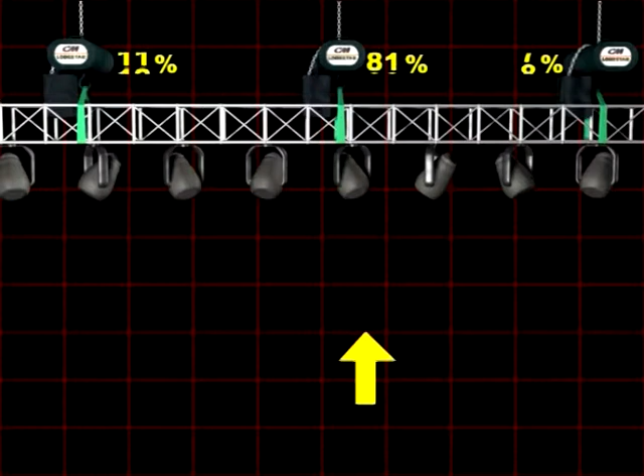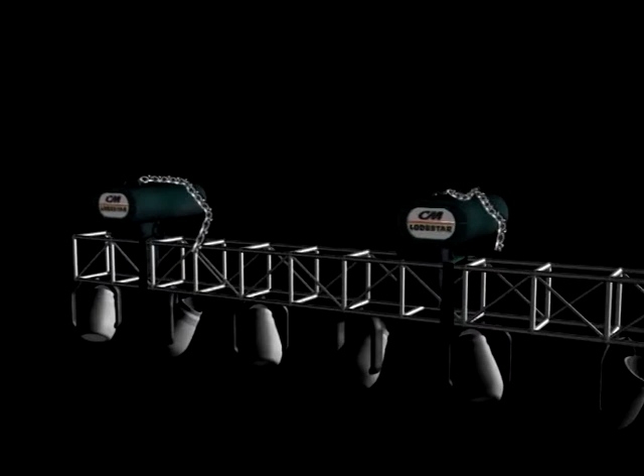Thus, overload situations might happen to the most experienced riggers, even if each hanging point's load is calculated and the calculation falls within the limitations of the nominal hoist and truss capacity. The actual load distribution on the truss is still unpredictable and cannot be calculated or even estimated, which in turn might cause an overload situation.

In real life, the rigger doesn't have a pause button.

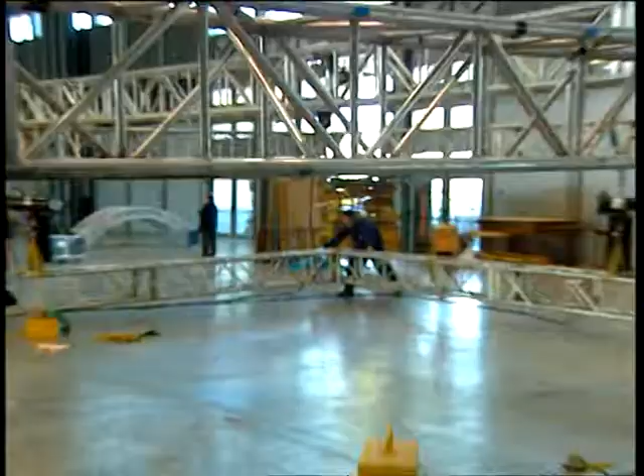In its January 2007 meeting, ESTA Task Group on Chain Hoist Usage decided to have its member, Eilon Engineering, conduct an experiment aimed at measuring loads and load distributions that occur in day-to-day stage rigging scenarios.

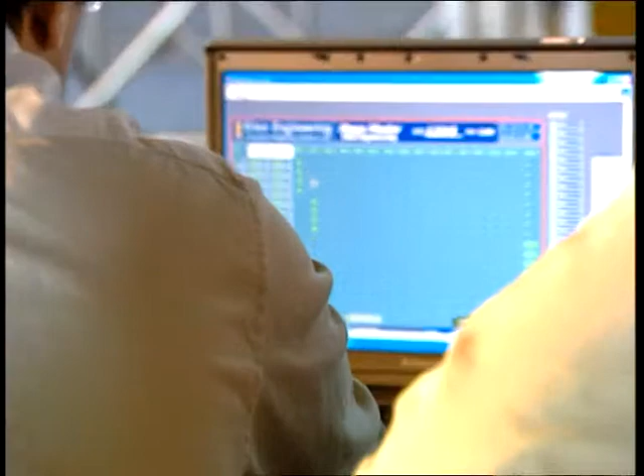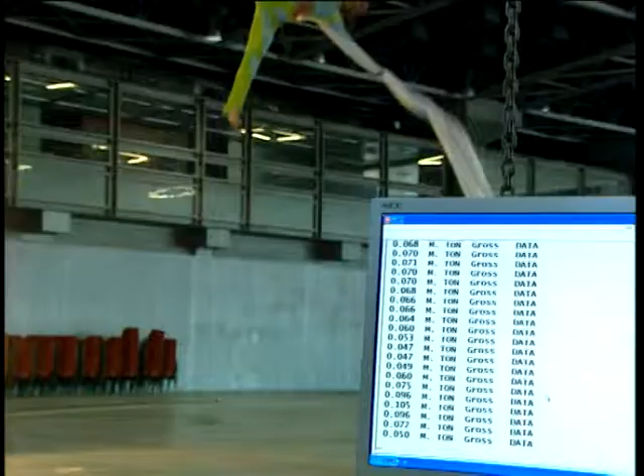On March 5, 2007, an experiment was conducted by Eilon Engineering in the Exhibition Center in Tel Aviv, Israel. The purpose of the experiment was to check the forces and loads involved in acrobatic shows and in lifting and hanging sound and lighting equipment for entertainment purposes.

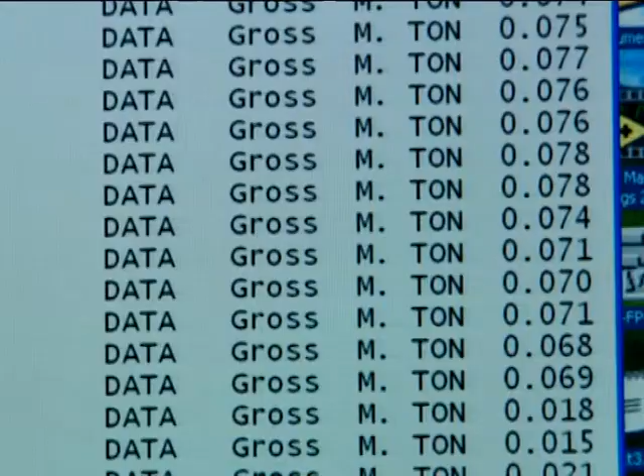The experiment was conducted in the presence of Bill Sapsis of Sapsis Rigging Installations USA, and with a special system which enables 25 measurements per second.

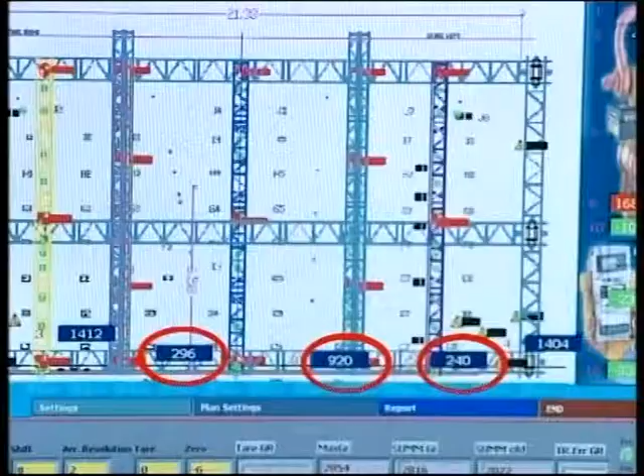Experiment 1: a structure of 1 truss with 3 loads and 3 hoists. Experienced rigging personnel attempted to level and balance the truss. When using the load cells, we could see that the attempts to balance the truss visually resulted in random balancing and imbalanced load division on the hoists.

We also noticed that the slightest operation of one of the hoists, even for a fraction of a second, resulted in the addition of hundreds of pounds, while the truss still appeared to be balanced. Conclusion: a visually balanced structure is likely to have imbalanced load division, and some of the hoists might even be overloaded.

Experiment 2: a mother grid structure was erected. The upper grid was suspended from the ceiling by 4 identical chain hoists simultaneously controlled by 1 switch. 1 load cell was hung in line with each of the 4 hoists. An identical arrangement of grid, hoists, and load cells was suspended from this upper grid.

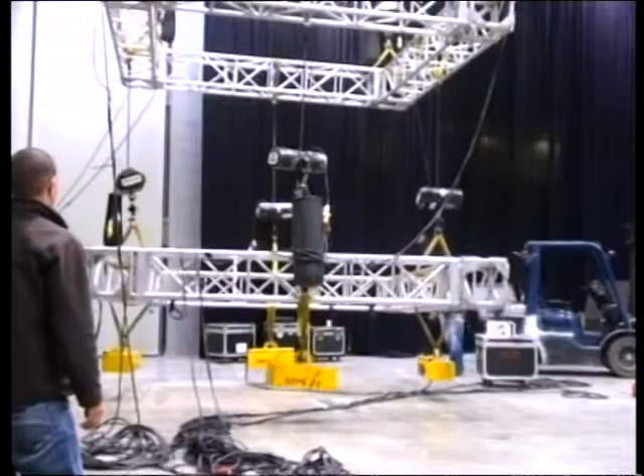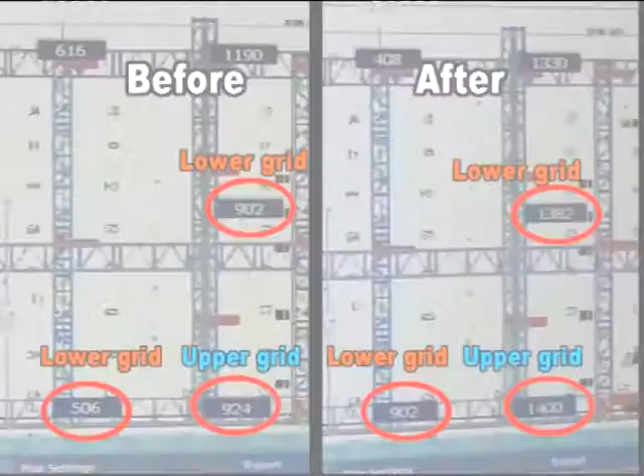In the experiment, a slight change in the weight of the loads on the lower grid triggered a practically incalculable change exhibited by the load cells. Conclusion: on a mother grid structure, any changes in the lower grid load or load distribution will usually change the load values and distribution on the upper grid, which in turn might cause an overload situation.

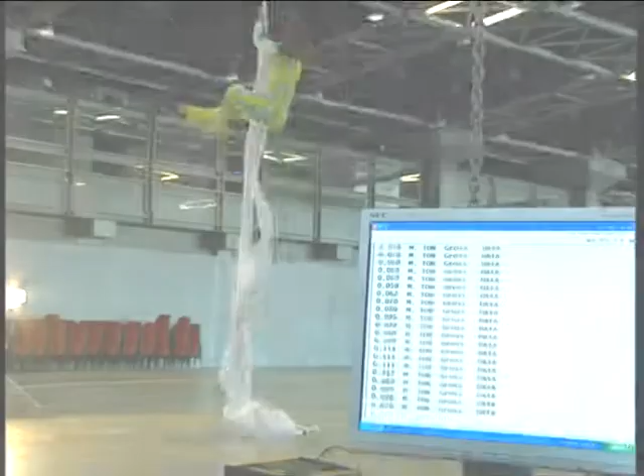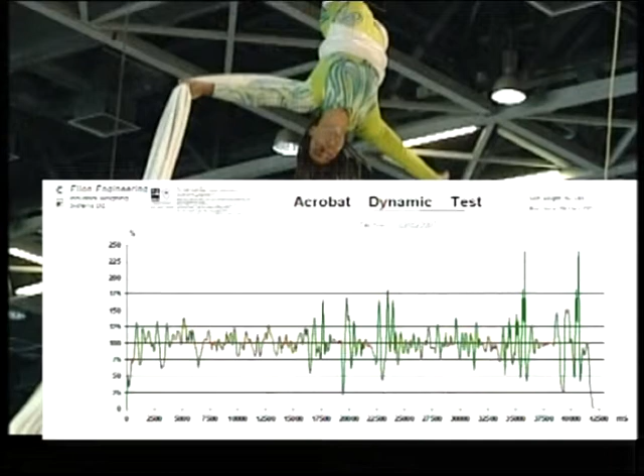Experiment 3: measurement of dynamic loads involved in an aerial acrobatic performance. The load cells recorded a maximum of 237% of the acrobat's self-weight. Conclusion: significant dynamic loads are involved in aerial acrobatics.

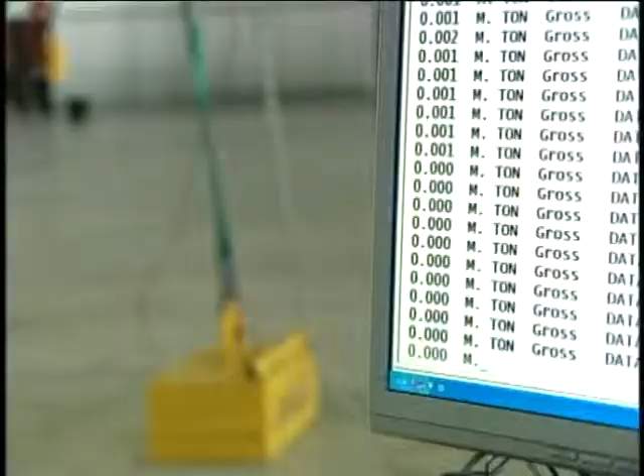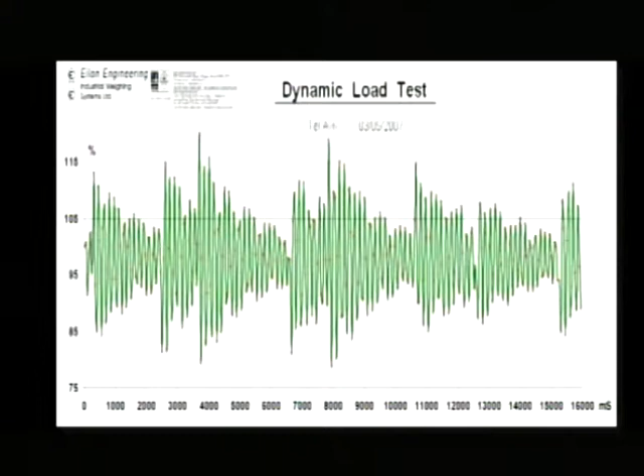Experiment 4: measurement of dynamic loads involved in lifting a load with a hoist and stopping the hoist's operation. This test was conducted with both 50 feet, 16 meter per minute, and 14 feet, 4 meter per minute hoists. With the 14 feet, 4 meter per minute hoist, the load cells recorded a maximum measurement of 120% of the load's weight.

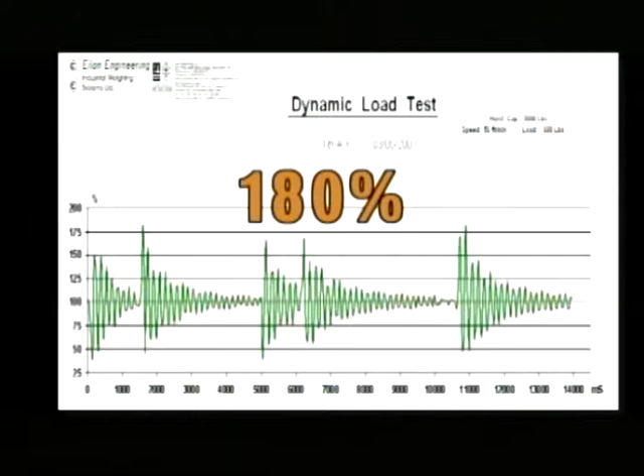With the 50 feet, 16 meter per minute hoist, the load cells recorded a maximum measurement of 180% of the load's weight. Conclusion: dynamic loads exist when starting or stopping the hoist's operation. The faster the hoist, the larger the dynamic forces.

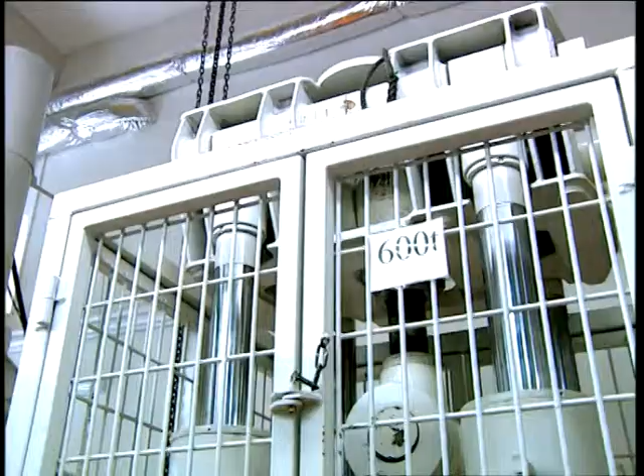Eilon Engineering has undertaken to harness our engineers' 3 decades of leadership in the industrial load cell industry to develop and launch a reliable, user-friendly platform to boost the rigger's performance, especially in preventing stage accidents due to overload. We are now proud to introduce the RON StageMaster, a completely wireless multi-load cell system for load monitoring and overload prevention.

The RON StageMaster is comprised of 3 components: the load cells, central receiver, and PC software.

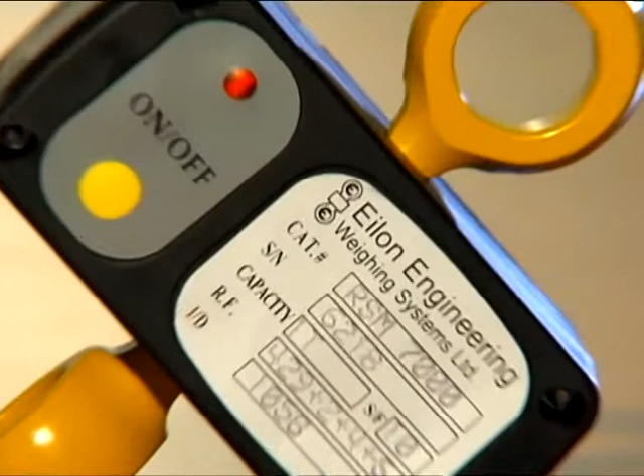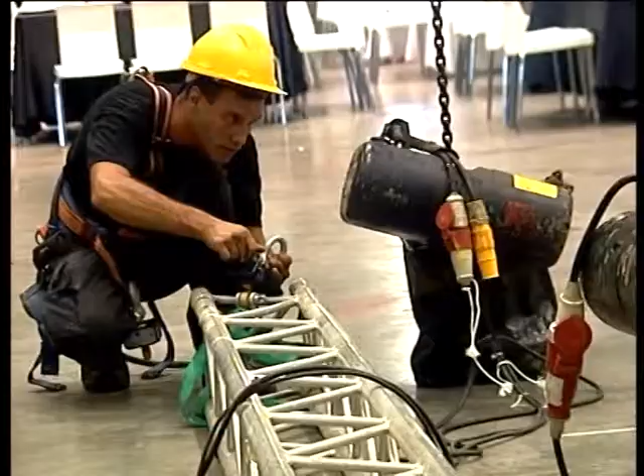The load cells. The RON StageMaster load cell embodies the technical know-how and the field experience that has been acquired from the sale of thousands of RON industrial crane scales over 3 decades now. Installing these wireless load cells onto the hoists is quick and easy. No messy cables for the wireless models, and a single main wire for the wired model.

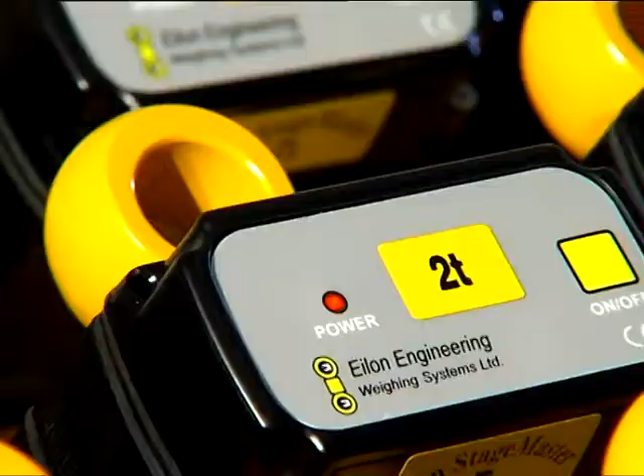The load cell is made of high-quality aerospace steel and is available in 2 safety factors, 5:1 and 10:1. It is available in standard capacities of 1 to 5 tons. Higher capacities are available, and in sets of up to 24 load cells per frequency and up to 4 different frequencies, with a system maximum total of 96 wireless load cells.

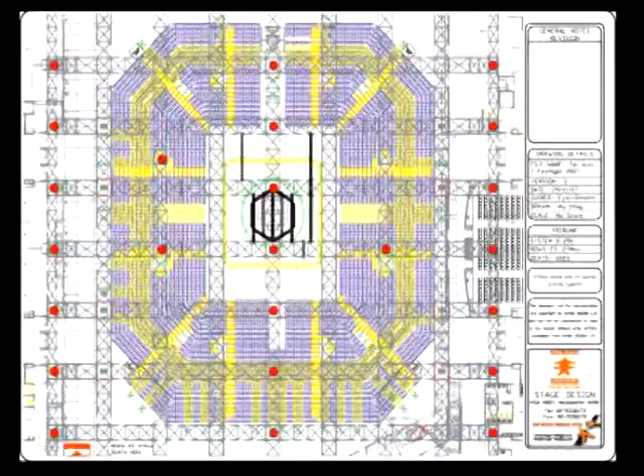Number of load cells: RON StageMaster 7000 Wireless Premium, up to 96 wireless load cells on 1 screen. RON StageMaster 6000 Wireless, up to 24 wireless load cells on 1 screen. RON StageMaster 5000 Single Wire, up to 256 load cells with a single main wire.

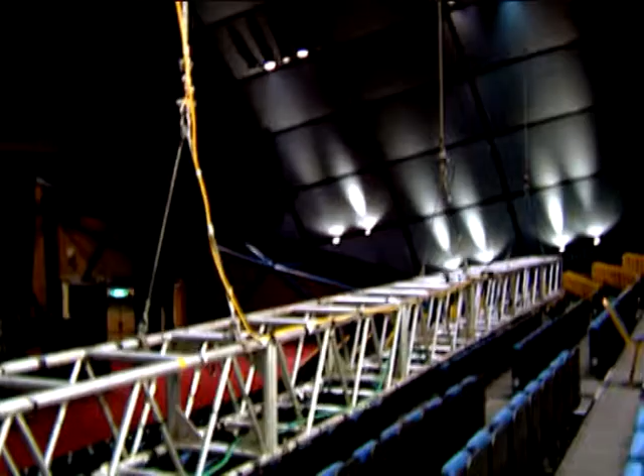The wireless RON StageMaster 7000 may be integrated with the single-wire RON StageMaster 5000 and together monitor on one screen a total of up to 328 load cells: 72 wireless load cells and 256 load cells on single wire.

The load cell shackle holes are shaped to have a 90-degree angle between their axes in order to eliminate external movement's influence which might cause inaccuracies. The battery life of this load cell is up to 1,500 hours on common disposable batteries, with optional 110-220 VAC operations.

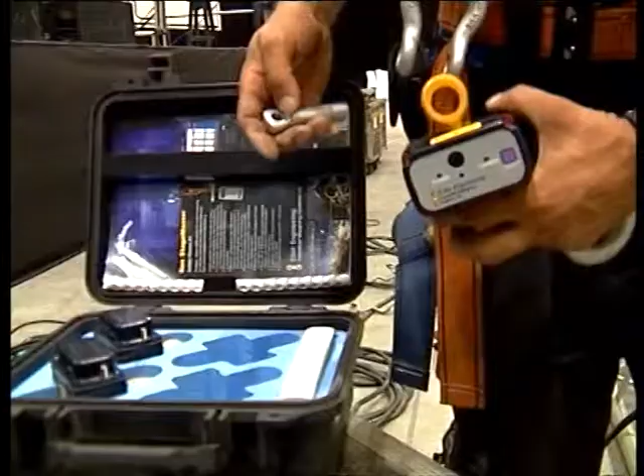Another distinguishing feature of the RON StageMaster load cell is its exceptionally small dimension that provides low headroom loss and easy portability. For example, headroom loss of the 2-ton load cell with 10:1 safety factor is 4.2 inches, 105 millimeters.

The central receiver has an RF reception range from the load cells of up to 500 feet, 150 meters.

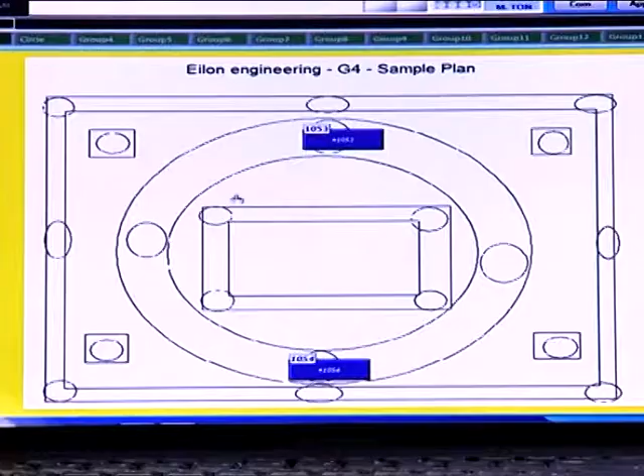The PC software. In addition to being the first wireless stage load monitoring system, the RON StageMaster is also the first to overlay the load distribution map on a grid plan preloaded from programs such as AutoCAD.

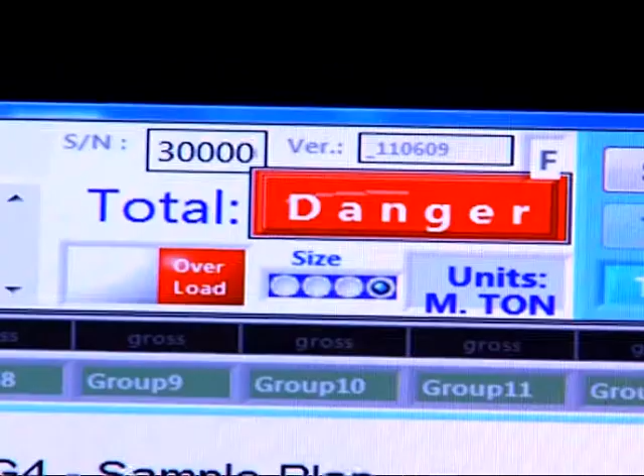This easy-to-install Windows 2000 compatible software provides real-time simultaneous load measurement, including overload and underload detection. It offers user-defined set points for overload and underload detection of individual hanging points, user-defined groups of hanging points, and of the entire structure.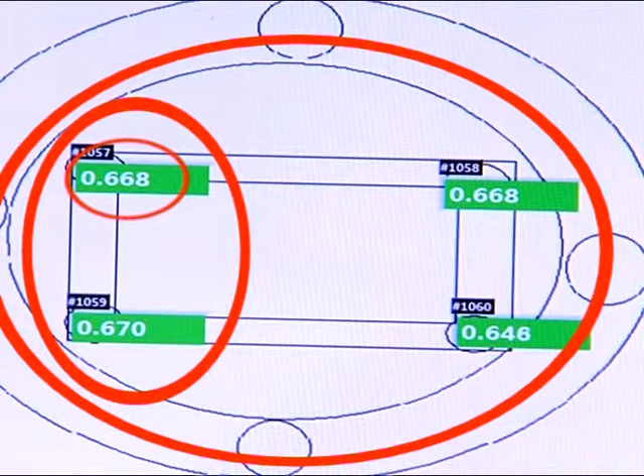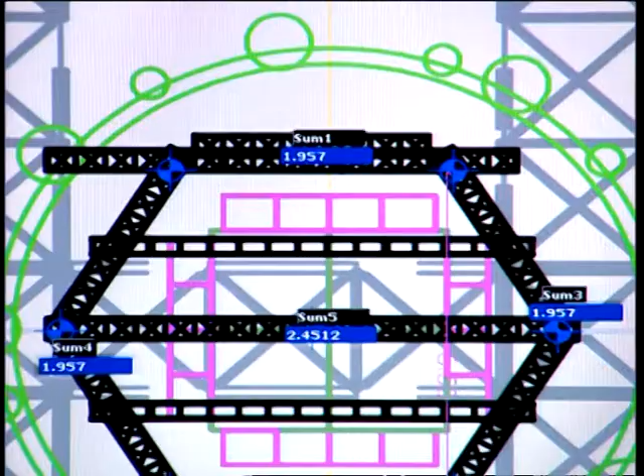Each set point can be used for a variety of purposes, such as setting off an alarm and stopping the hoists using any controller currently available on the market. Logical zoom-in and zoom-out features enable the operator to quickly spot specific load cells in groups.

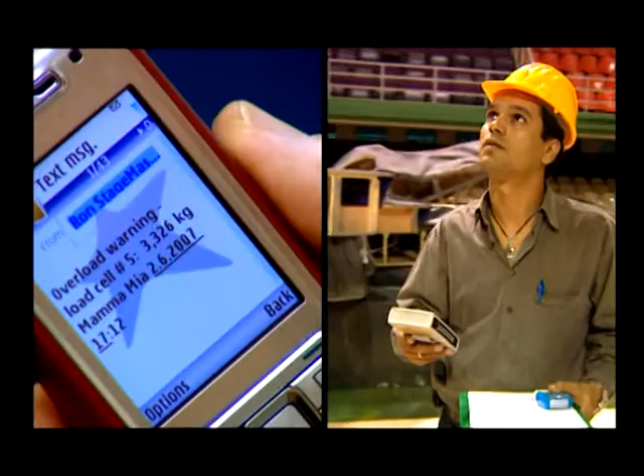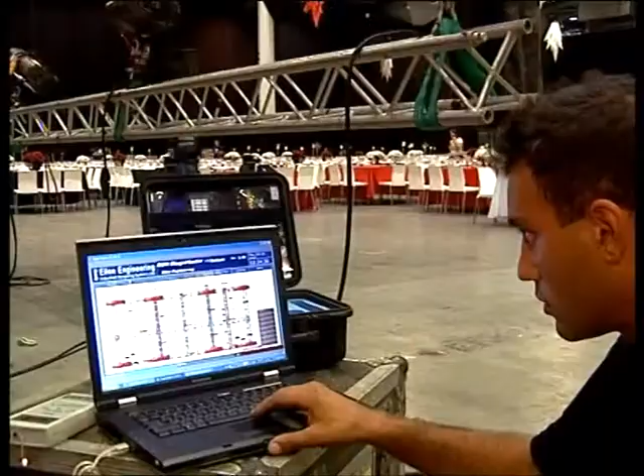Optional features include real-time cellular text message (SMS) alert on overload occurrence and customized PDA for on-the-go load monitoring. It is therefore an innovative tool to unburden the rigor of the stress involved in overload prevention without knowing the actual load values and distribution.

In addition, from a risk management perspective, the RON StageMaster may justify riggers' request for lower liability insurance premium.

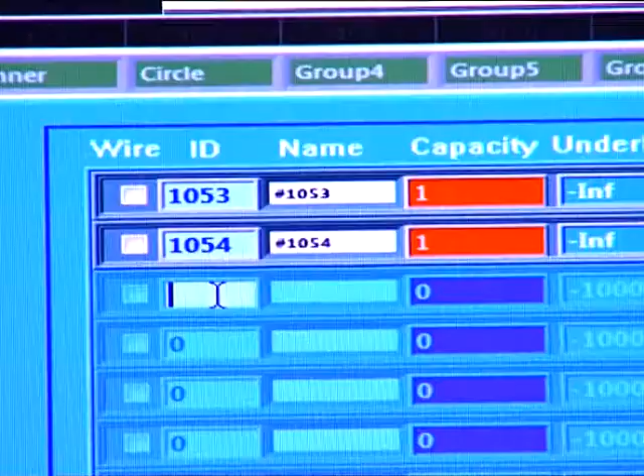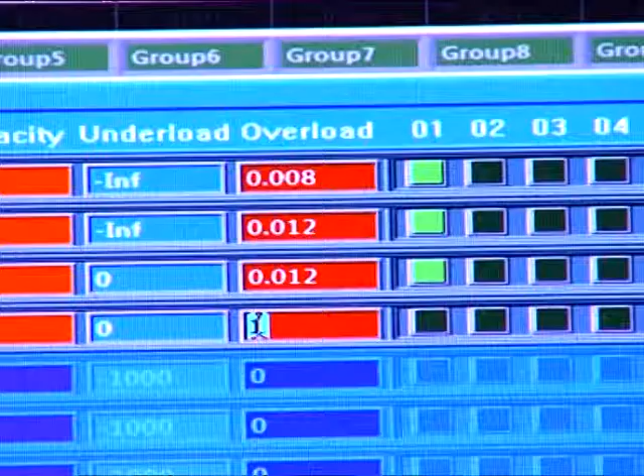Here is a summary of the main screens. Settings: using this screen, you determine which load cell will belong in what group and assign a customized overload value for each load cell. This screen enables you to drag and drop the load cells onto the underlaid grid plan according to their physical location on the structure.

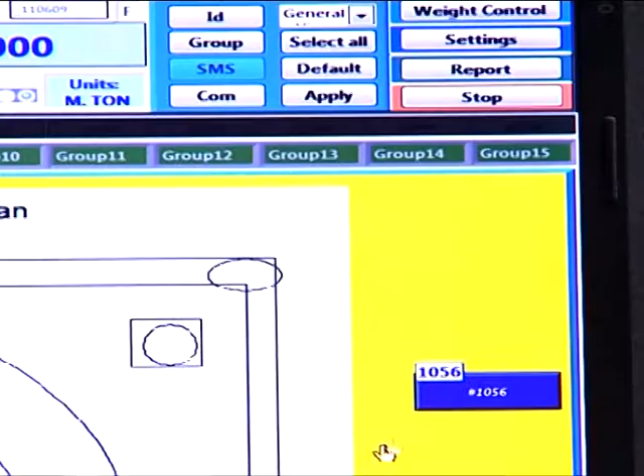This feature enables the rigger to immediately identify exactly where the problem is located on the stage structure. The next screen is used to assign group names to associate the load cells with the group functionality or location, for example speakers, east upper truss, etc. Using this screen, you set customized group overload values.

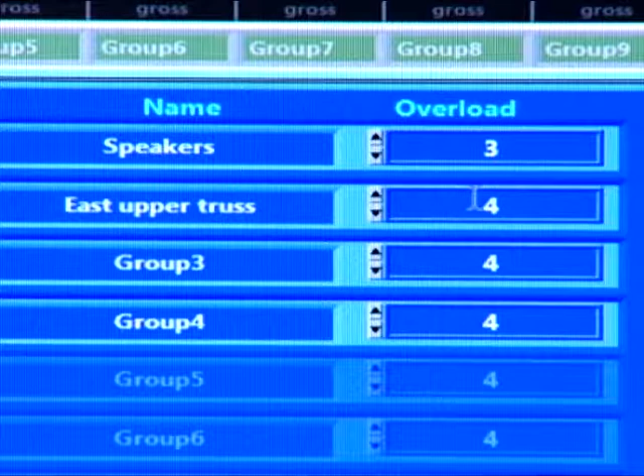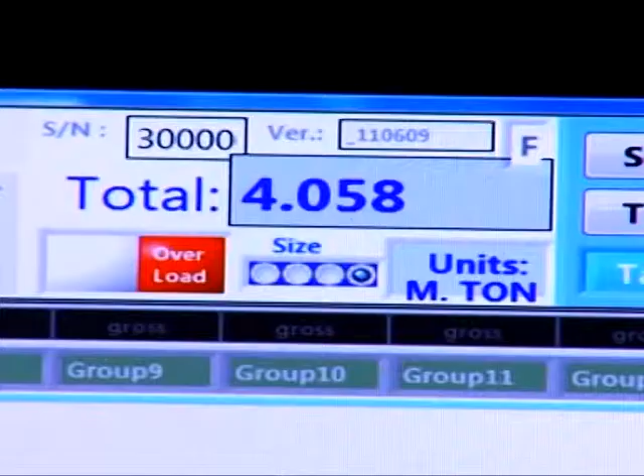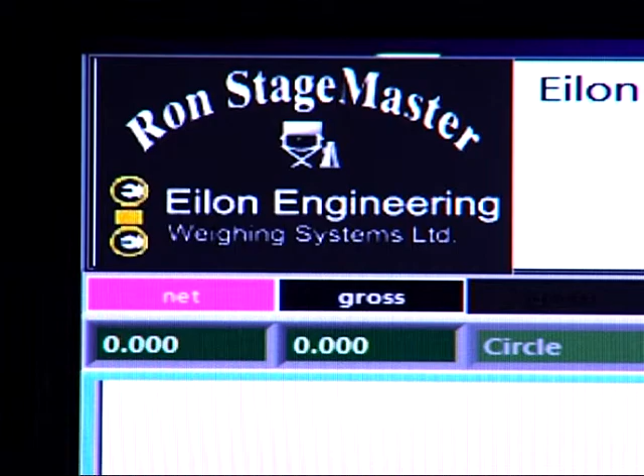Weight control. This is the main screen that displays simultaneously in real time load values and distribution map. In addition, it will show important group data such as the sum, max, name, tare, zero, and situations such as overload and danger.

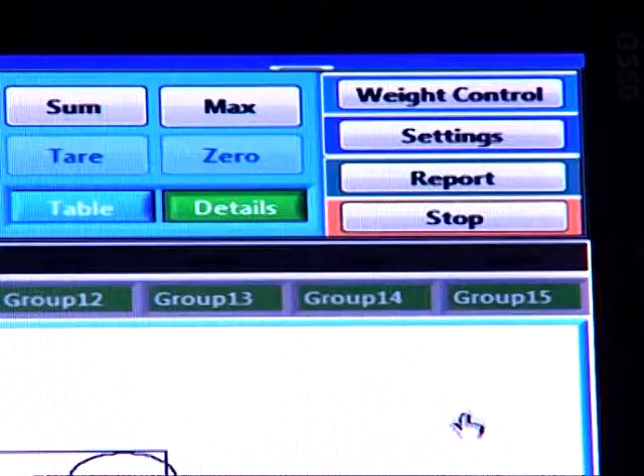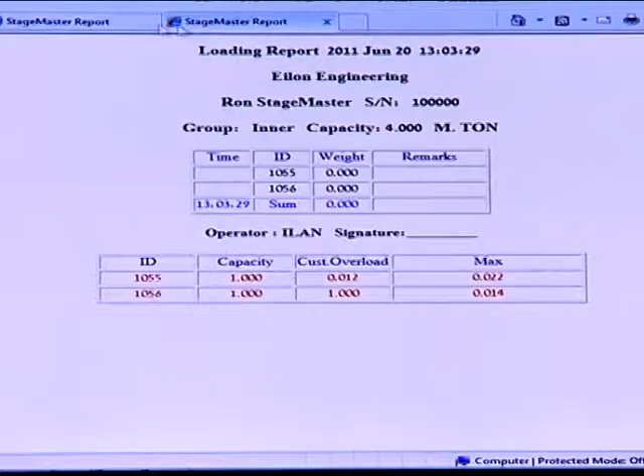Reports. RON StageMaster has a powerful report generator of downloadable data log of months of continuous measurements, as well as all instances of overload and danger, that is easily transferable to any database software.

Remember the near accident that we showed at the beginning? Now you have the tool that enables you to spot any undesirable load distribution the moment it begins to be dangerous, and immediately take corrective measures by stopping the hoist and, more importantly, using the load map to determine how to best rebalance the load distribution.

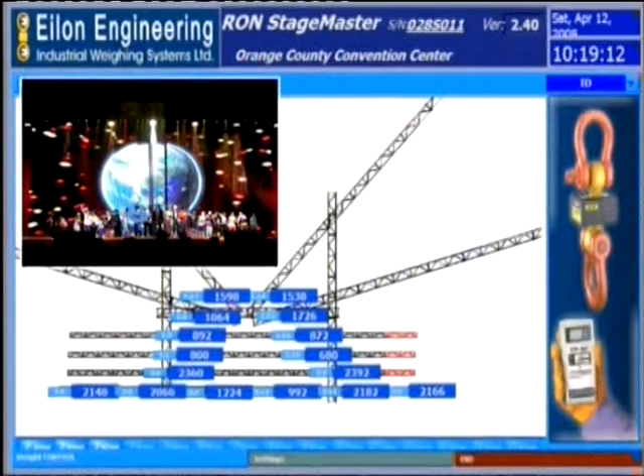The following video section shows usage of RON StageMaster by Orange County Convention Center, Orlando, and the safety added value of it. You are looking at a video that shows the RON StageMaster wireless load cell system, implemented on the McDonald's Global production at the Orange County Convention Center in Orlando, Florida, in April of 2008.

The set consisted of two 3,500-pound Mitrix video walls, four LED video walls each at approximately 1,200 pounds, one sheer drape and one velour drape, all of which were on travelers. When closed, the total concentrated load was approximately 21,000 pounds.

A relief grid was installed to help disperse the load out and away from the 30 by 30 foot bay that all load points were suspended under due to the building's structural steel limitations.

Notice how the RON StageMaster system monitors the dynamic loads of the video walls in real time as they move off and on stage. This system was the added safety factor that we have been looking for in our industry for a long time.

Thanks to Eilon Engineering, McDonald's Corporation, Vegas Rig LLC, and the staff of the rigging department at the Orange County Convention Center for all of their hard work and attention to detail that made this production a huge and safe success.

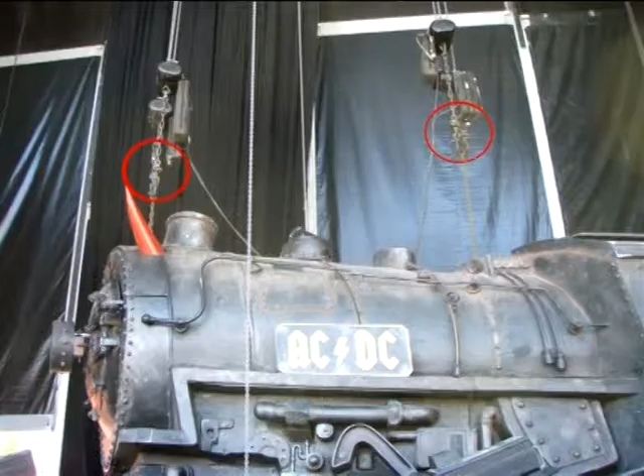And in the largest world tours such as AC/DC, and the European shows of Metallica, Elton John, Lionel Richie, and others.

In addition to load monitoring on stage, the RON StageMaster has been used in aerospace and military applications, for example by NASA and several militaries. RON StageMaster: no more overloads on stage.